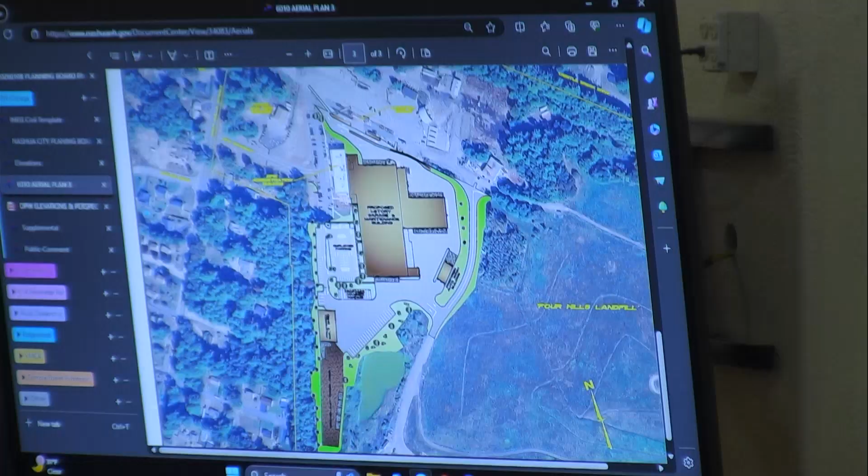Before I turn it over to Janet to talk about the design of the building, I want to point out a couple things about how the building sits on the site in relation to the abutting properties. First, while the building is large in scale, it is located about 600 feet from West Hollis Street itself and about 520 feet from the closest dwelling, which also sits on West Hollis Street. It's also located about 700 feet from the closest dwelling on Trestlebrook Drive, 1,800 feet from the closest dwelling on Farmwood Drive, 2,400 feet from the closest dwelling on Teak Drive, 3,000 feet from the closest dwelling on Twilight Drive, and about 4,200 feet to the closest dwelling on Pioneer Drive.

We've also tried to maintain about a 100-foot wooded buffer from the proposed project to the closest property boundary. The proposed building itself will largely be hidden from public view, as it is located behind the existing DPW administration building.

Furthermore, given some of the existing grading constraints on the site, we're able to site the building approximately 5 feet lower than the existing admin building. In other words, the floor elevation of the garage building is about 5 feet lower than the first floor elevation of the DPW administration building. The combination of these items helps minimize the visual impact of the building to the public view.

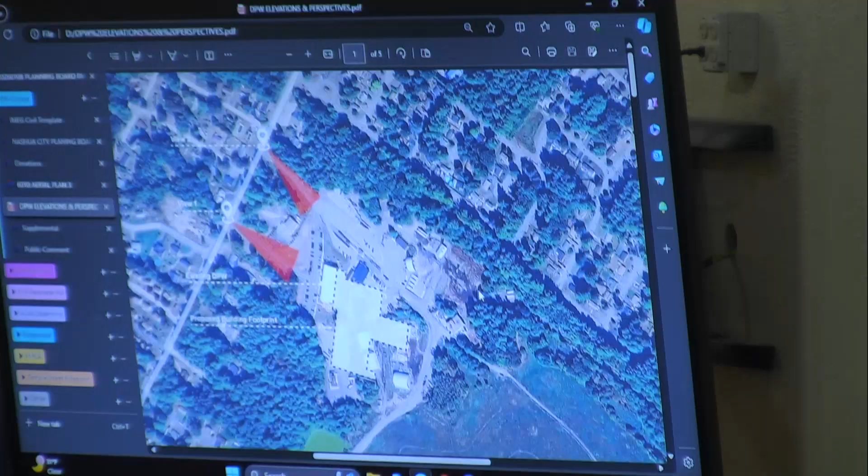Connor, if you can scroll to the first one. To help demonstrate this, Janet's team prepared two perspectives showing the proposed building and its view from the public on West Hollis Street. This first one is looking down the Four Hills landfill driveway at West Hollis Street. This is clearly not this time of year, with the leaves on the trees, but as you can see, the proposed building sits behind the existing DPW admin building.

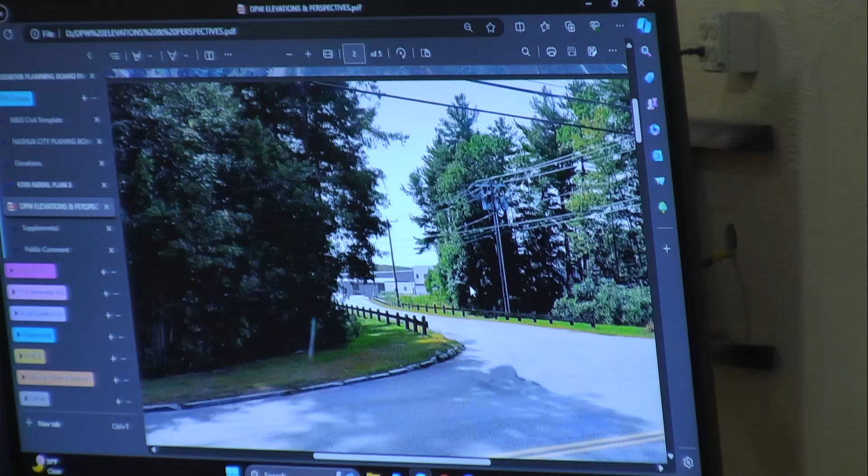If you can scroll one more, Connor. This second view is looking down the DPW administration building entrance, also at West Hollis Street. You can see the primary viewscape is really the DPW admin building, with the garage sticking out just to the right of that. As you can see by those two presented perspectives, there's not a significant viewscape of the new building to the public from West Hollis Street.

At this time, I'd like to turn it over to Janet Slamenda, the project's architect, for a couple minutes to talk specifically about the building design.

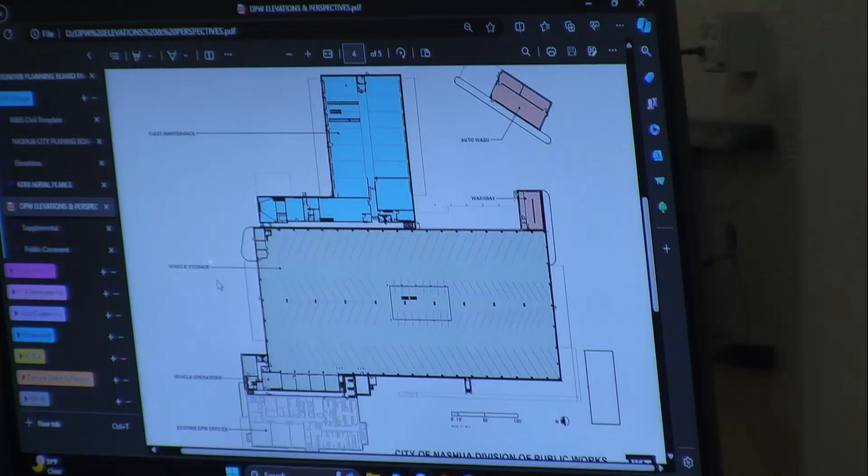The big vehicle storage building is purposely designed to be very flexible. There are 120 line spaces, but those spaces are very deep, so you may see trucks double back, seasonally changed. I do a lot of DPWs for a living, and I know these plans will change how they're used from season to season, year to year. What worked last year might not work this year. During big storm events, they'll be preparing vehicles to get out. Since it's a minimally heated building, they won't have to run their engines a lot to get going—they'll be stacked and ready to go, using those drive aisles to get the first vehicles out as fast as possible.

It is a big building—200 feet wide by 448 feet long. There's one row of columns; the rest is clear span, which is also typical for a public works facility.

There are 6 double bay maintenance facilities, plus welding and tire areas, which are specialized areas. The rest of the linear blue portions in the back are office space and support spaces like parts rooms that support the maintenance departments.

On both sides of the vehicle storage, you'll see support spaces. We can't forget there are staff working here all day—they need access to places to eat, toilet facilities, and shower facilities. Most of the shower facilities are in the existing building. When we designed that original building, we planned for all of that so that when we added this building, it was a minimal add.

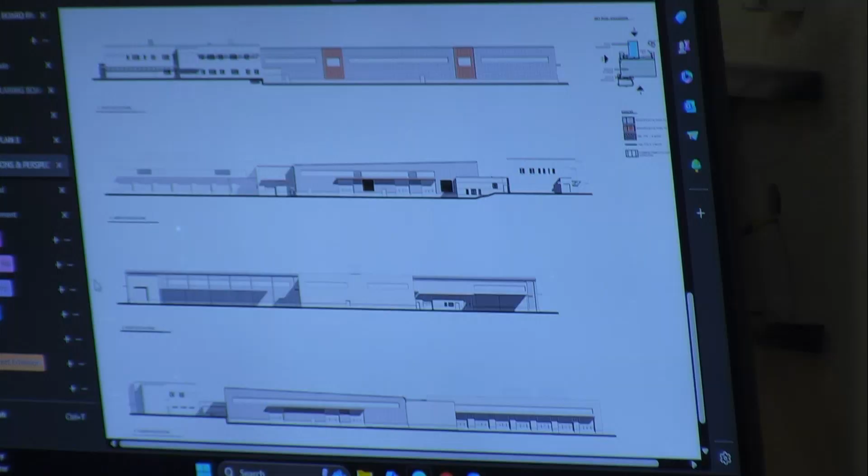There are two roof profiles to look at. It's kind of hard to see, but there is a sloping roof over the vehicle storage building. It's almost a flat roof pitched to drain, and then the rest of the building has a flat roof with some mechanical equipment that supports maintenance. The fleet maintenance building has sheet roofing material, whereas the vehicle storage building has a standing seam roof.

There are varying heights to these buildings. We didn't build things bigger than they had to be, so everything is as low as possible, and they vary from 19 feet to 33 and a half feet in height along the process. Those heights support the incredible amount of equipment in the fleet maintenance, including bridge cranes and exhaust systems to keep the building safe for employees.

We have concrete masonry units, same colors. The metal pieces will also be very similar in color. We're trying to keep the language going from the administration building. There are some over canopies and some panels which will be the copper color you see on the existing building. The CMU materials were selected to protect the buildings from the trucks, which kick up dust, dirt and gravel, so our buildings always include a masonry base, or in this case, the fleet maintenance building is masonry all the way to the top.

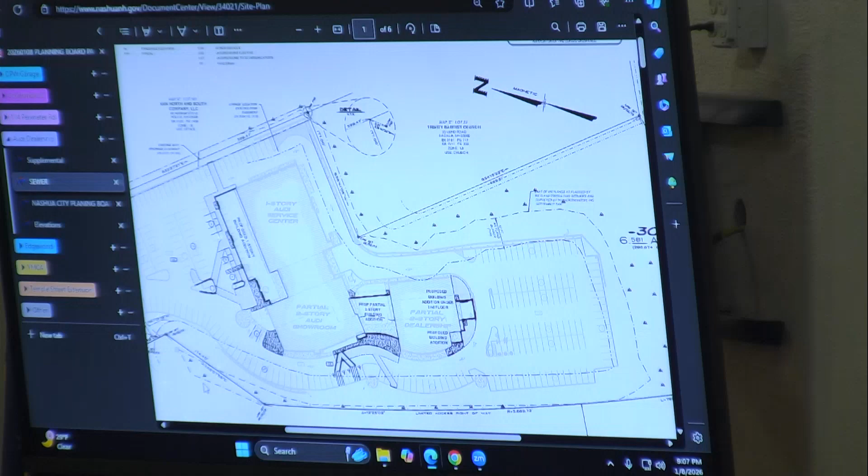In 2001, we appeared before this board to redevelop that site into the Porsche Audi dealership, and it's operated in that manner for about 24 years. As everybody knows, in '24 and '25 a portion of the dealership moved over to the former Holiday Inn site on Northeastern Boulevard and built a magnificent facility there. That freed up room for Audi to spread its wings a little bit, get more site room, and allow for some of these additions I'm going to go over in just a second.

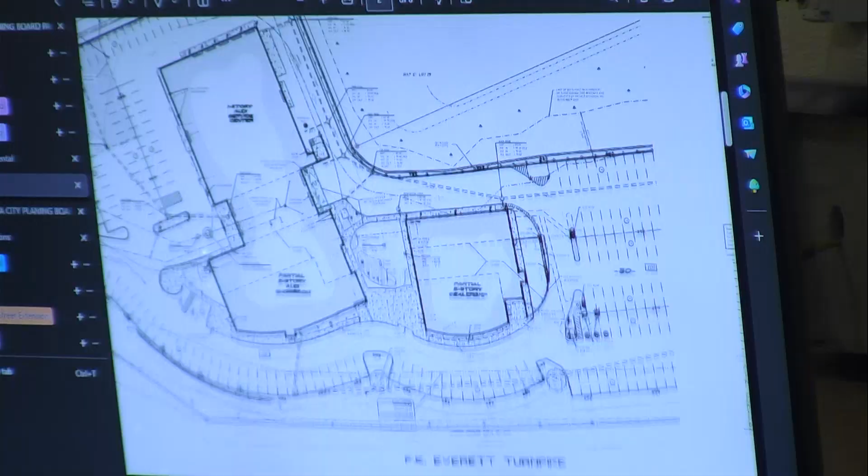Currently on the property right now, you see the various buildings, 2 buildings, totaling about 62,000 feet, with 264 car spaces on the site. As we know, auto dealerships have a unique form of counting cars and parking spaces—it's a combination of display, employee parking, customer parking, service vehicles, things of that nature.

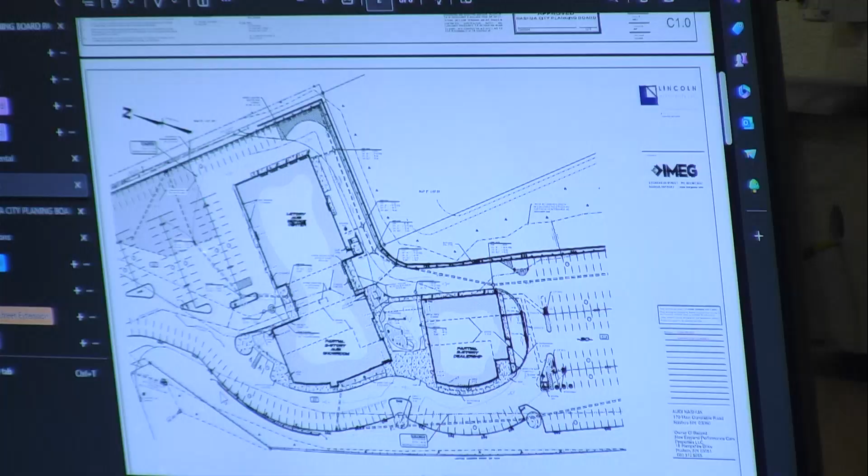What's being proposed this evening are really 4 building additions that enable Audi to transfer from a dual brand dealership into one dealership, on the south end of the site. Next slide, please. Thanks, Connor. Next one, I guess.

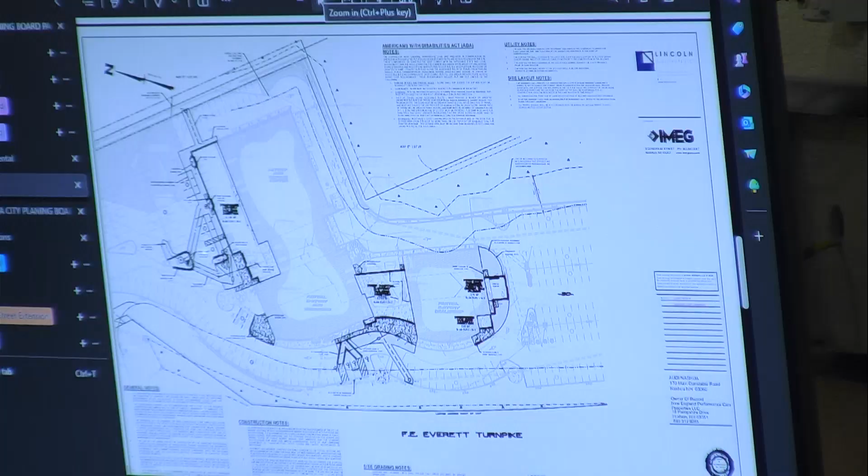On the south end of the property, two very small building additions: one for a building entry, and the other is on the underside of a current underpass to an above building, for a photo booth, about 1,000 square feet on the south side.

A larger addition in the middle of the site infills the gap between the former Audi dealership and the Porsche dealership. That's a partial 2-story addition, totaling about 6,800 square feet.

The addition on the north side is to the service end of Audi. Audi has 25 service bays on this campus right now, and we're adding 5 new service bays to the site.

Minimal impact to parking, as I said, with Porsche moving all their display, all their customers, all their employees. Audi now feels like they have plenty of room to operate this dealership: 255 spaces, about 9 less than what's currently there, but well in conformance with Nashua regulations.

Only minor site improvements, a little bit of sidewalk and some utility service connections. We did a traffic impact letter report worksheet, which did not meet thresholds - very minor impacts in the AM and PM peak, less than 30, and about 336 new trips over a 24-hour period. Did not meet the threshold for any further study.

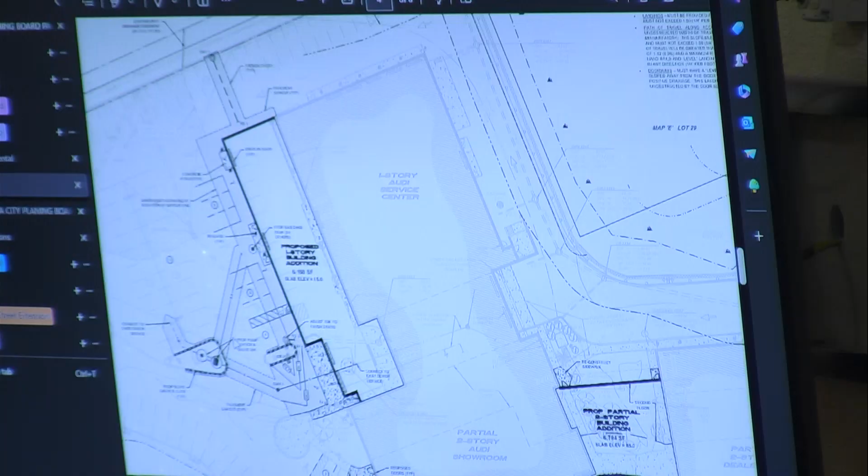Architecturally, there's a graphic at the end of the scroll. Simply stated, it's going to match the branding and current architecture on campus right now - flat roof, fixed glass windows, architectural metal panels, Audi-branded signage on the property, and the pylon sign that exists is to remain.

Mr. Chair, we've asked for 2 waivers. The first is 190-279, survey of adjacent parcels within 1,000 feet. I can't wait till that gets out of the land use code.

The next one is the architectural standards. As you know, your current regs seek pitched roofs and entry features, but that's just not applicable when we have additions such as this. We're really trying to match the architecture of the existing building. So, 2 waivers in a letter dated 12/25.

If successful, we hope to start in the spring of '26, about a 6-month project to complete. In summary, we believe the application conforms to the code, and the conditions of approval identified by staff are acceptable to us.

One item I'd like to mention - I goofed on this application and didn't put in a landscape plan. We owe that to staff, subject to their review and approval, and our client is fine with that. So we respectfully seek your approval this evening and are happy to answer any questions.

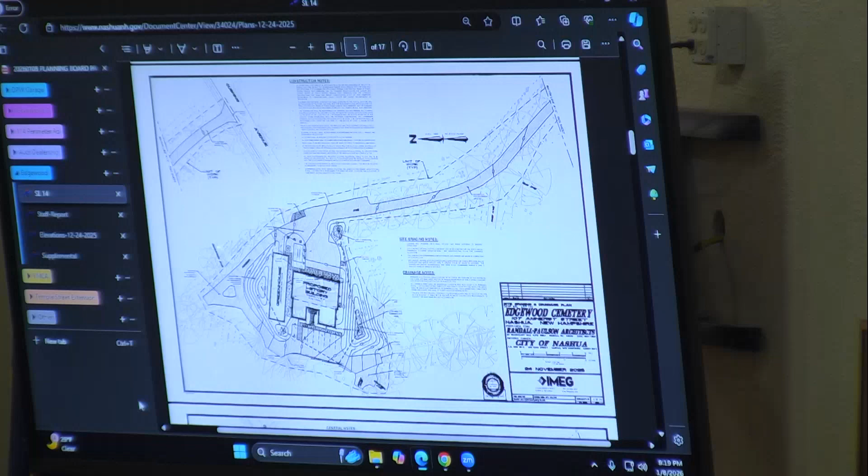Cushing Ave to the south, and ultimately Amherst Street to the west. Accordingly, the site is primarily abutted by residential uses to all sides, with some additional commercial, office, and restaurant uses along Amherst Street. As previously mentioned, the subject site is currently developed as an active cemetery. It contains a chapel, 2 garage buildings, 2 greenhouses, an office, shed, and other associated site features.

Topography on the site can generally be classified as moderate, sloping from a high point in the northeast corner of the property along Ashland Street, generally in a southern direction towards Cushing Ave. Access to the site's several internal roadways is provided via 4 curb cuts: one onto Ashland Street, one onto Amherst Street, and 2 onto Cushing Avenue. The existing building is serviced by a private septic system, water by Pennichuck Waterworks, private propane, and underground electric and telecommunication utilities.

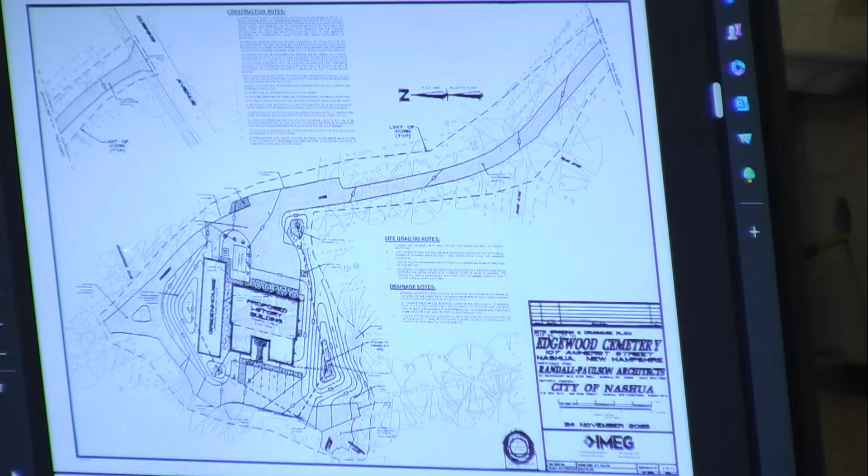Currently, cemetery operations are spread across 2 garages, a shed, and an office building, all of which have reached the end of their usable life, and it's not really viable or cost-effective to try to renovate the existing structures. As such, it is proposed to demolish the existing buildings and construct a new 1-story building and detached greenhouse.

The proposed building will have a footprint of about 4,583 square feet. The rear portion will contain a large garage for storage and maintenance of the cemetery's trucks and equipment, much smaller than the last garage. The front of the building will contain a break room, waiting area, vestibule, and office space for cemetery operations.

Additionally, a new 2,500 square foot greenhouse will be constructed adjacent to the garage and office building. A small 8-space parking area will be constructed in front of the proposed building, primarily to service visitors to the site. Employees will continue to park in the back, and the existing internal roadways will all be maintained in their current location, with the proposed parking areas and rear truck court tying into these existing roadways.

In terms of traffic, the project is really a replacement in kind of the existing structures on the site. As a result, this new building will not create an increase in staffing levels beyond the 5 full-time employees and 5 summer seasonal employees that work out of Edgewood Cemetery today. Therefore, the proposed project will not generate any additional traffic to the site.

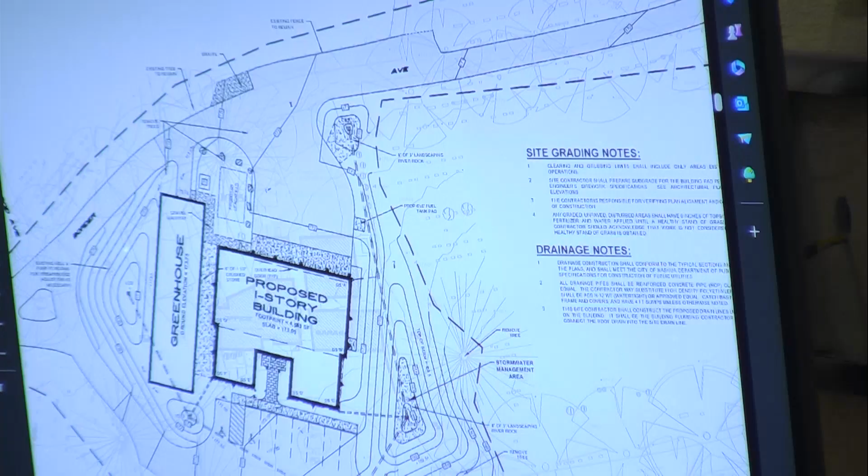Good evening, Happy New Year, happy birthday.

Caroline Morell with Randall-Paulson Architects, and I'm going to talk a little bit about the building, its massing and materials. So we can start with the floor plan — the main goal here is to reconcile the 2 different uses that Ethan explained in a single cohesive building.

In the back, we are hosting equipment maintenance, so the goal is to be utilitarian, practical, durable, efficient, and it requires a high bay. In the front, on the other hand, we have the office and staff quarters, and that leads us to provide something more welcoming, warm, and also very respectful of the grieving families who come and visit.

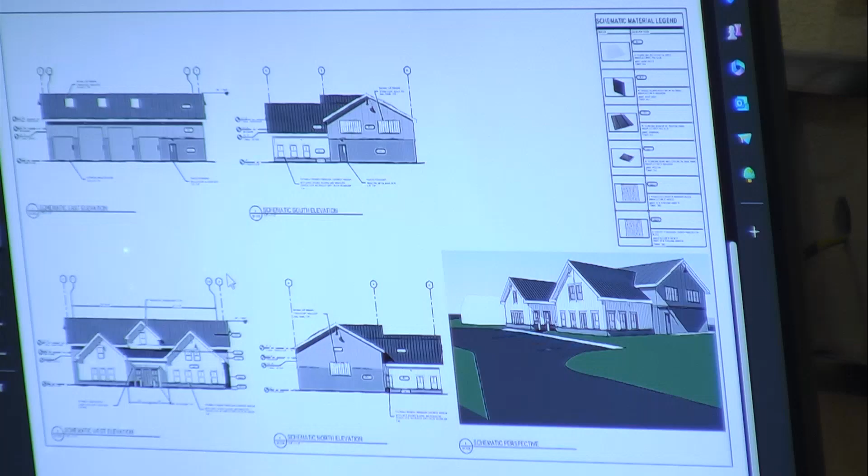In the back, however, because we want to be efficient and durable, we're raising the base of the CMU higher, and these are insulated CMUs. Then above that, we have insulated metal panels, and insulated metal panels for the roof as well.

Then in terms of color scheme, we want to remain in a natural, very neutral type of color scheme. The idea is to be in dialogue with the granite chapel that Ethan mentioned, and also the general use of granite around the tombstones in the cemetery.

In addition, it is our intent to remain attached to typical buildings in New England, and to be in rapport with whatever is happening around in terms of the neighborhoods and the residential character.

In terms of sustainability, especially in the back — and you heard the architect for the previous DPW talk about this as well — we're offering translucent panels, both at the walls and at the skylights, to help with daylight. All the materials and insulation are there to provide an energy efficient building and a pretty tight building.